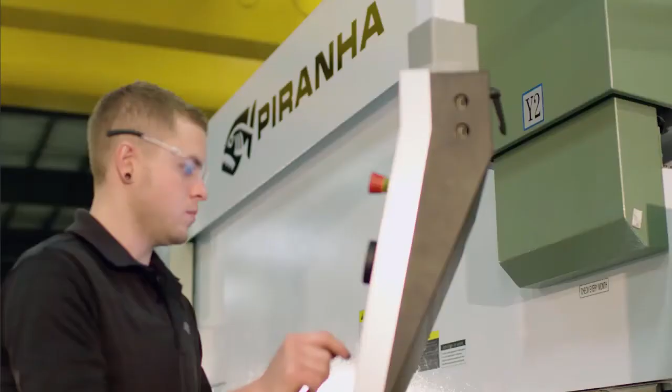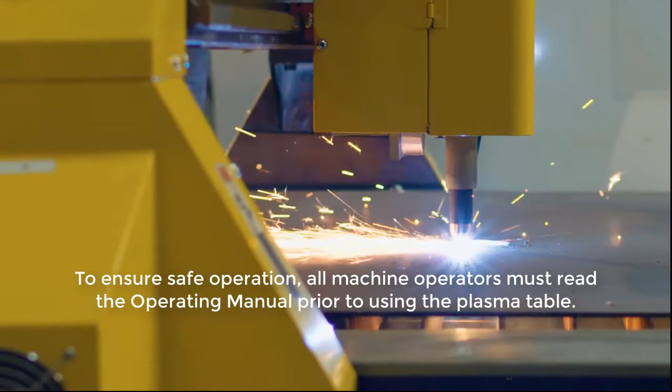Thank you for purchasing a Piranha C-Series plasma. This video is a quick start guide to help get you up and running and is not intended to replace the manual.

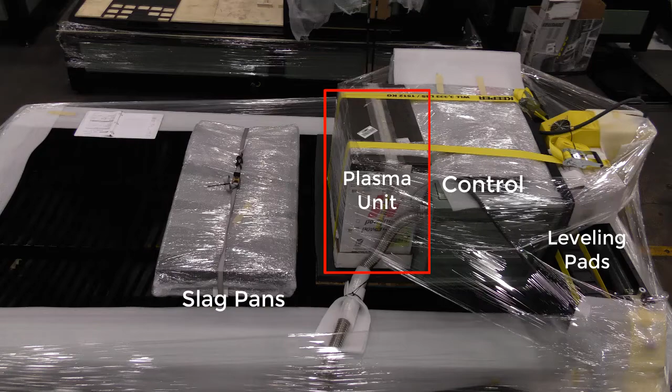Please inspect the machine for any damage upon arrival. It should look something like this. The standard machine will arrive with 4 components on top: a box containing leveling pads, the control itself, the Hypertherm plasma unit, and the slag pans for underneath the machine.

After removing the shrink wrap, your next step should be to open the leveling pad box to get the leveling pads prepared for installing the machine. The leveling pad box will contain 4 to 6 leveling pads, the operating manual with installation instructions, and the software, which will have your software protection key in the bottom right corner.

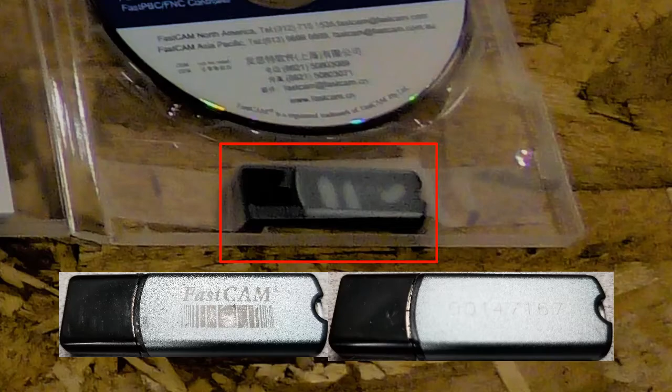Please note that this is not a USB drive. It is the licensing device for your software and must be installed in a USB port for your software to function. Prepare each leveling pad by threading the nut up to approximately 4 inches from the base.

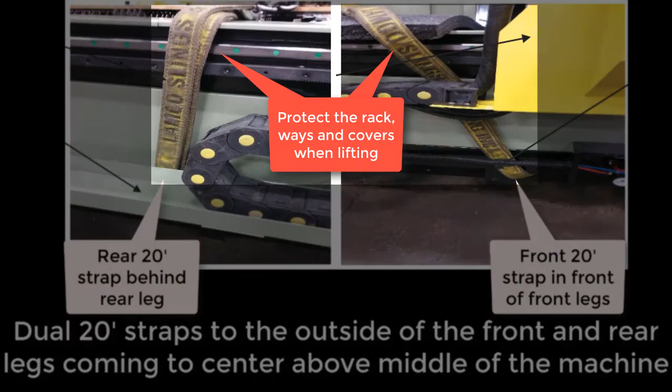The preferred method of unloading the machine is with an overhead crane, or a forklift with at least 8-foot forks can be used. When using an overhead crane, make sure that the straps are outside of the cable carriers to prevent any damage to the machine.

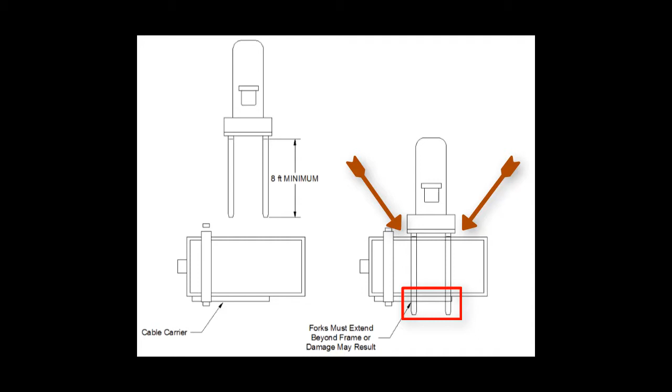If a forklift is being used, the forks must be at least 8 foot long, and the forklift must be able to handle the maximum weight of the machine being provided. The machine must be lifted from the side opposite the cable carrier, and the forks must extend beyond the bottom of the machine to make sure that the load is balanced.

Next, thread the leveling pads into the 4 corners and, on a 10-foot model, into the 2 leveling sections in the center of the machine.

Once the leveling pads have been installed, move the machine to its final location and remove all components that are on top of the machine to prepare for leveling.

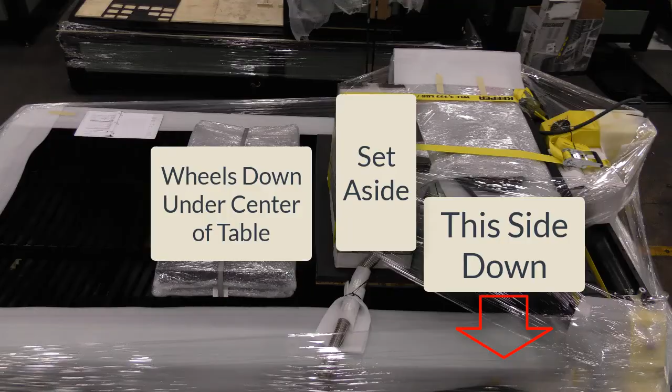The flexible conduit going to the control panel may be loose upon arrival. If so, simply insert the flexible conduit into the hole. Make sure that you insert the plastic backing connector, then tighten the nut onto the opening.

The machine must be level before operation. When dealing with a 10-foot long machine, raise the center pads off the floor so they will not interfere with the initial leveling. Place a carpenter's level on the left-hand cover on the control side and find which end is higher.

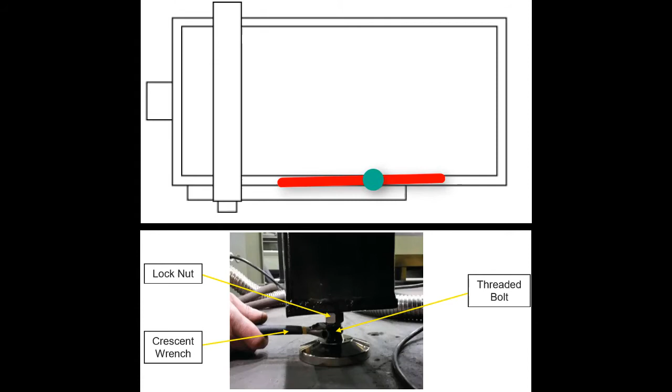Using a wrench, rotate the nut of the threaded bolt clockwise to lower the high end until this side is level. Then move the level to the front of the machine and level the front right corner to match the front left corner. Continue around by matching the right rear to the right front.

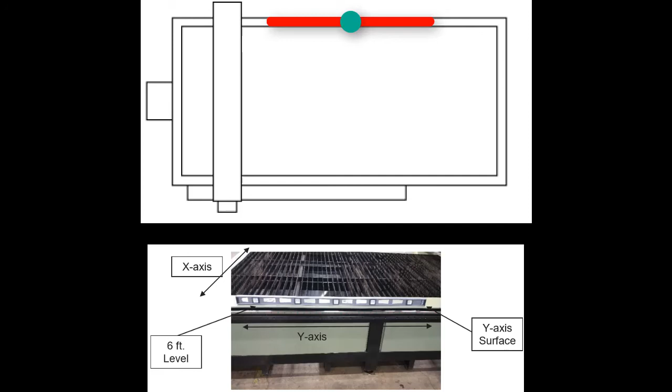Then verify the rear side, which should now be level as the other 3 sides have been completed. Once all 4 sides have been leveled, lower the center leveling screws down to the floor and then tighten all 6 jam nuts.

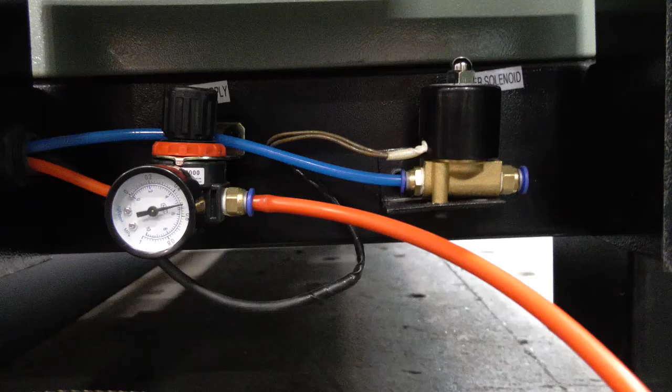The supplied air connection is for 8mm tubing. This fitting can be removed and replaced with a 1/4 inch NPT fitting to match the necessary incoming supply. Once the air is connected, pressure should be set to 65 psi or 4.5 bar.

If the pressure were to drop below 60 psi or 4 bar, an alarm would show on the control, notifying you of low air pressure.

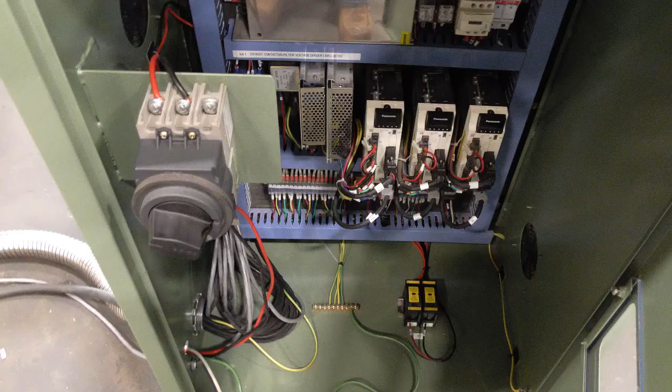Incoming power should be connected by a qualified electrician. Connect the 220 single-phase power to the 2 left-hand terminals on top of the power switch and the ground onto the ground bar on the bottom of the control cabinet.

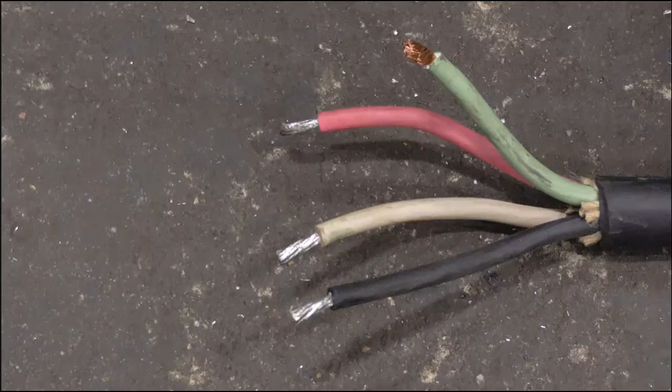Once the Powermax unit is removed from the box, you'll need to connect the power lead and the ground cable. A qualified electrician should connect the power lead to a properly sized service disconnect. Service size will vary depending upon the plasma unit purchased. Please refer to the Hypertherm Powermax manual for exact details.

The work ground connects here. Align the key with the hole, insert the plug, and then rotate about 1/2 turn clockwise to lock in place. Slightly pull on the plug to ensure a good connection.

The torch lead connects here. With the button facing up, insert the plug until it clicks into place. Slightly pull on the plug to ensure a good connection.

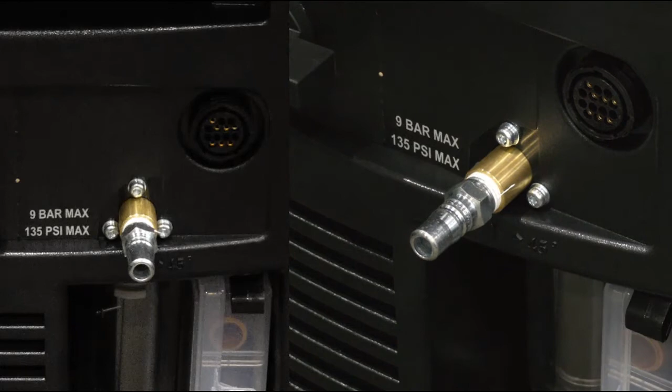On the back of the unit are air and interface connections. Install the appropriate quick connect fitting for your air hose onto the unit. Verify your incoming air pressure is less than 135 psi, then connect your air hose.

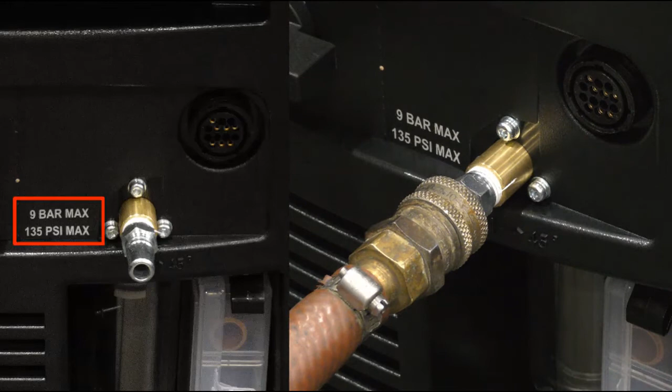The interface cable is keyed to only go in one way. Rotate the body of the plug until it goes into the connection fully, then rotate only the locking nut until it is securely in place. This concludes machine installation. If you have any questions, feel free to check the website or give us a call.